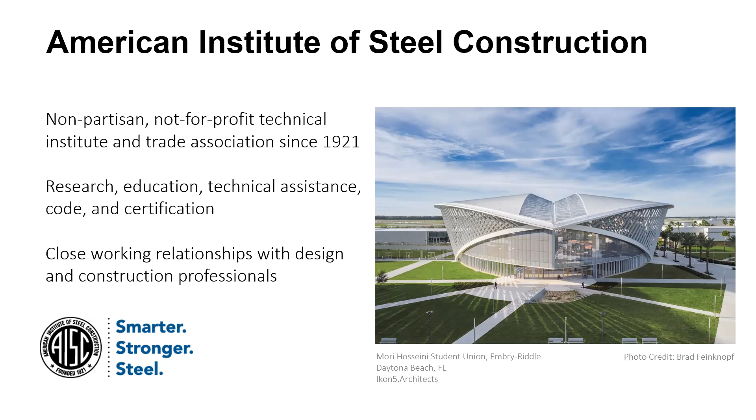I'll do a brief introduction of myself. I'm an architect and I taught architecture for over 22 years, 20 years of which were at Oklahoma State University, go Pokes. And I had to move home to Chicago, but I'm happy to still be interacting with students through AISC. And speaking of students, we do a lot with students.

You may be familiar with the ACSA Steel Design Student Competition that has been held since 2000, so a pretty long run. You're seeing some of the first place prizes from last year. On the left is category 1, the monument, and on the right is the open category, where you design anything as long as it's with steel.

This year, the program is a spiritual space on a campus of your choice. You can do this alone or as part of a studio, but you just need a faculty sponsor. So you can read through that program on the website, and we still have the open category just as we always have too.

We give lots of scholarships out. Last year, we had over $360,000 given away to juniors, seniors, and master's level students. We hope we have a good showing for these scholarships. One side tip is that we have a small essay, a short essay, and you need to focus on steel for that.

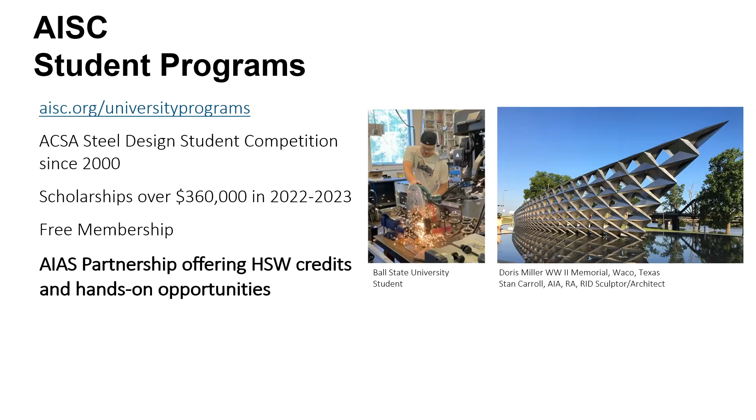We also facilitate a lot of hands-on opportunities, maybe in studio, but also at Grassroots next summer, we're holding a tour at the Ironworkers Training Facility just outside of DC, and you can weld, bolt, climb columns, a lot of different things there to get some hands-on experience. We encourage other kinds of steel activities like touring a fabrication shop or going on construction tours. If you can't do that physically, we have VR tours that you can walk through on our website.

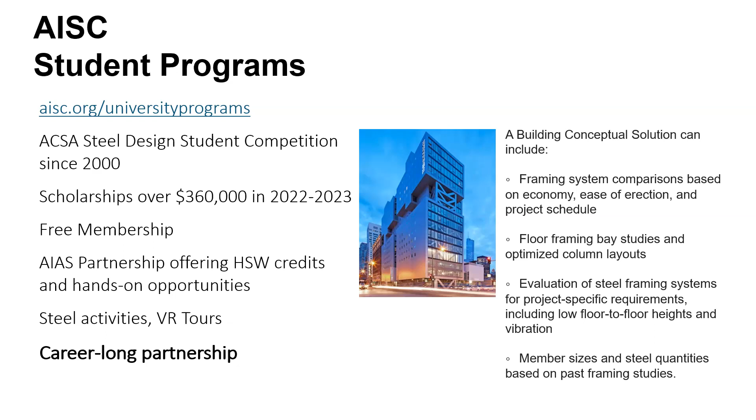And I mentioned emphasizing career-long partnerships. We have a Steel Solutions Center that architects and engineers can call into for anywhere from conceptual ideas and solutions to something more detailed. And you're going to hear more about this today, but if you're designing with sustainability in mind, structural steel is actually a really good choice.

U.S. domestic steel is truly cradle to cradle. That loop is closed, and every time it's recycled, it doesn't lose quality. So domestic steel is made up of 93 to 98% recycled steel. We take old cars, appliances, deconstructed bridges and buildings, and we keep those out of landfills, and that scrap is melted into new steel using electricity.

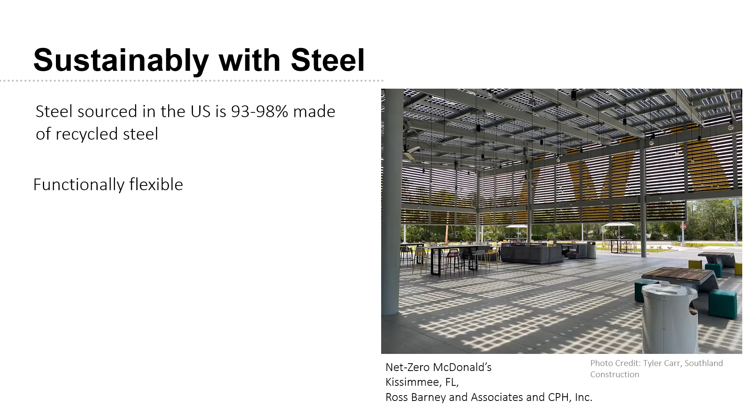But a steel frame building in the first place is less likely to be scrapped. Steel buildings over their life have lots of flexibility. If occupancy or loading changes, it can be more readily adjusted, and you can have longer spans so the interiors are much more flexible. We have lots of transparency in terms of reporting about embodied carbon of the life of steel material, so we have extensive environmental product declarations that anyone can view.

So in the US and Europe, electric arc furnaces are used, and they're a much cleaner technology than basic oxygen furnaces. So now the focus is shifting toward the electricity to power those, and a lot of mills and fabrication shops are moving toward renewable electricity. You'll hear more about that, but we mentioned you can get health, safety, and welfare credit.

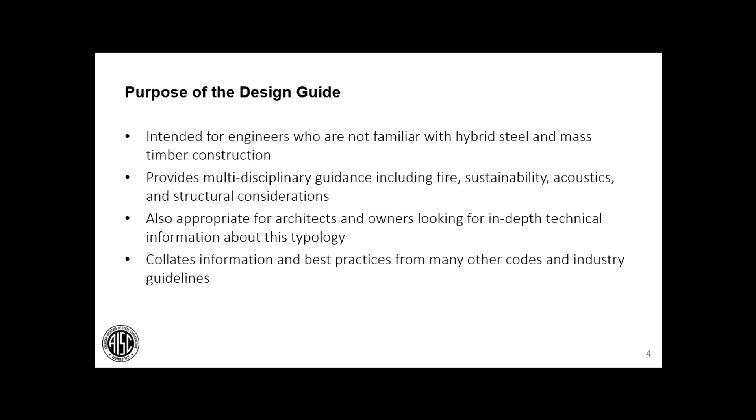So the main focus and audience was certainly some structural focus - there are sections geared towards structural engineers, but really we tried to be broader as we crafted this to talk about the typology of hybrid steel frames and wood structures that could be accessed both by architects as well as owners and developers who might want to know more about why you would entertain this system, what the benefits might be, and how it might be applicable to their project.

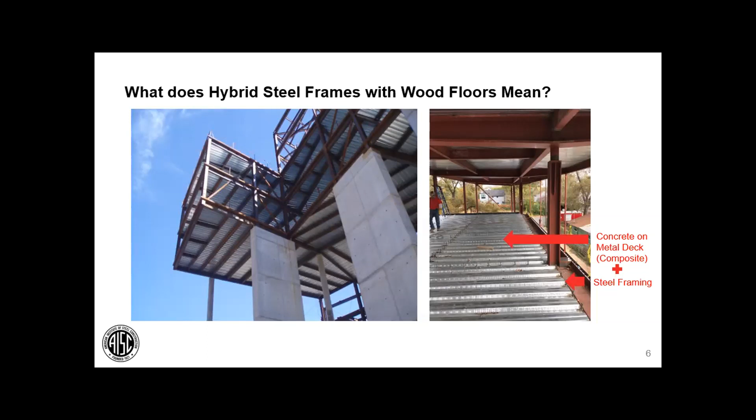And why is this different? Why did we write a whole design guide about this? Well, traditional construction with steel buildings, especially commercial projects, a lot of the times we've used concrete as that framing with metal deck, and it's a very effective system - the reason a lot of buildings use it is it's a good system to use. It has some benefits - essentially that metal deck that you see from the underside looks a lot similar to that previous image, and that metal deck has studs to connect the steel to the concrete. There's some reinforcement, and that steel deck acts as formwork from which to then pour the concrete on top. And the concrete actually works together with the steel to be a composite structure - that's what we call this type of system, a composite concrete steel on metal deck structure.

And this is looking at it from the top.

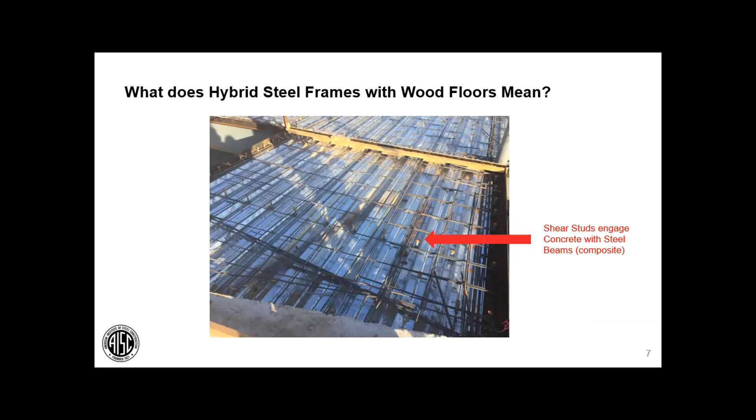Again, you can kind of see these are called studs. They look like little screws that are welded and connect the metal deck to the steel, and ultimately the concrete's cast over to have it act together.

We'll talk about why this is a little bit new and why we're seeing it more and more in the marketplace, and where owners, developers, and architects are asking for this.

The way we're going to chat through it is by going through the chapters. There are 7 chapters in total that we're going to walk through, and we'll go through the highlights on a lot of those. We're going to end with pictures, something you can see an actual building, how it's put together, to try to understand those components. That is going to be our case study with Houston Endowment at the very end.

So let's dive straight into chapter 1 and go into mass timber background information. First thing, what is mass timber? Well, we'll start with the opposite. What isn't mass timber? First off, it's not stick framing or balloon framing.

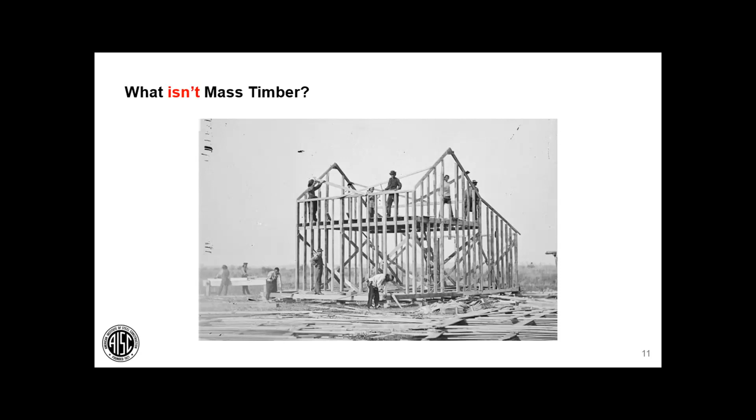You might see, especially in the suburbs, a lot of homes built like this out of really small 2x4 material or plywood. That is not mass timber. We usually refer to that as stick framing.

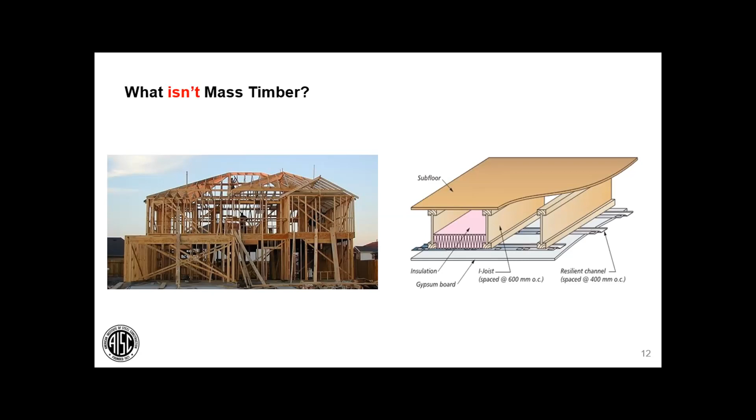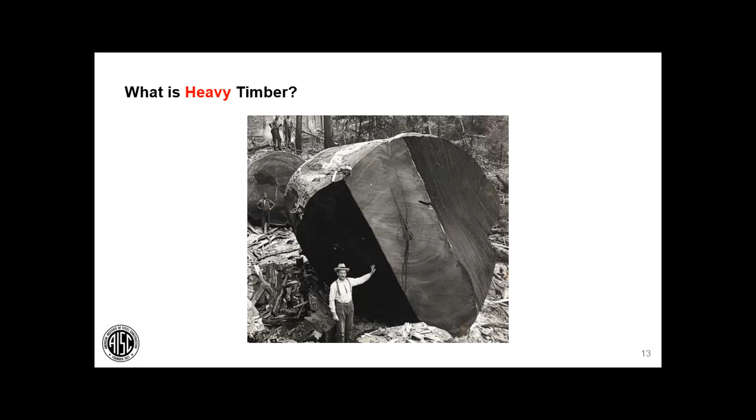Likewise, mass timber is not heavy timber. Heavy timber is sort of the opposite of the 2x4s. You actually get a tree and say, all right, let's go for a big piece of lumber—that's got to be mass, right? Well, no, that's heavy timber. That's where you have a larger piece of timber cut out of essentially a historic tree.

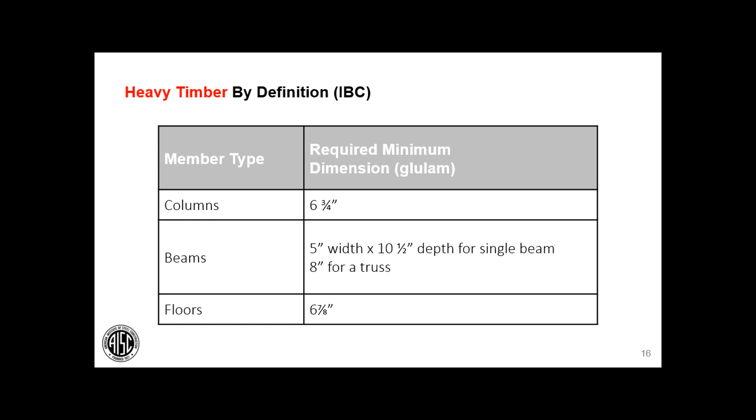If you go into the IBC, into the code, that's how heavy timber is defined—about its fire rating performance and having a big enough piece of wood to where under fire conditions it's essentially not going to collapse. So there actually is a definition for heavy timber, but really

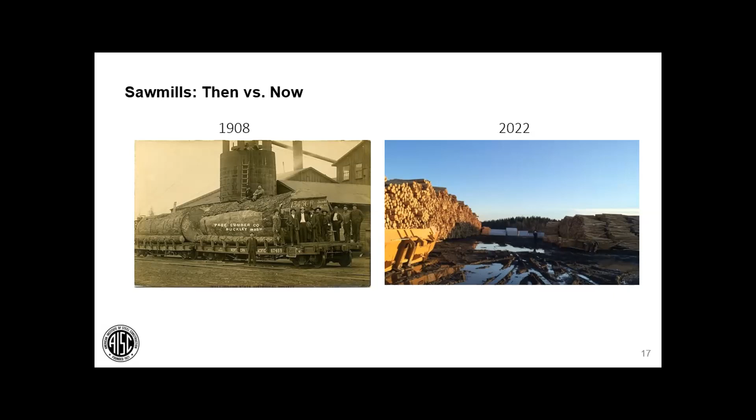when we say mass timber, it's kind of the next generation version of that. Heavy timber, on the left-hand side, comes from cutting down a really large historic tree. You can't really find those anymore if you want a very long span or a big element. So what we do is use more new growth trees and smaller members that we can then cut into components.

We can then actually look at the pieces of timber and rate them, seeing which ones are really good and high performing, and which ones are maybe not as good. We can optimize how we put those smaller pieces of timber together with some high performing glues, and then create large timber elements out of these smaller elements. That is fundamentally what mass timber is—you're creating an engineered product out of smaller pieces of timber to make a bigger element.

So pretty similar to heavy timber at the end, but how you build it and engineer it is much different. Some of the benefits are you can get a much more stable product because you can scan and look at each small piece of timber, rate it, and get some very high performance products. You can also get almost any size of element you want. Really what's changed in the last decade and plus is now you can get panelized mass timber products—not just glulam beams and columns, but actual plates and materials that can be used as pieces of floor plate.

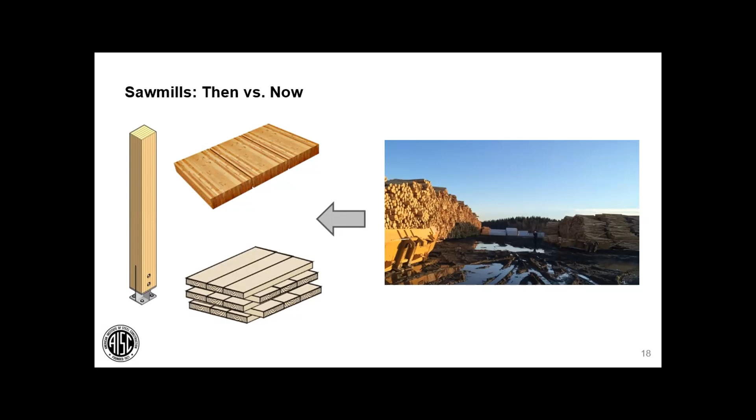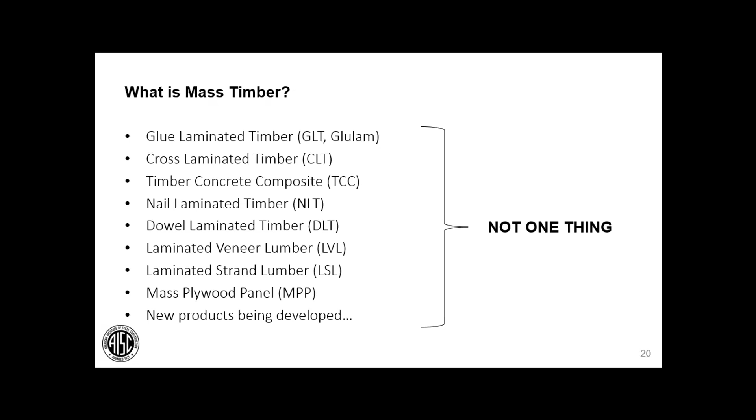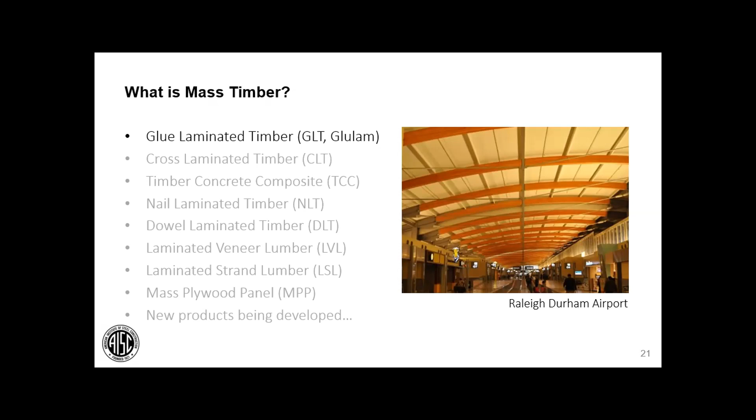So again, for a full mass timber building, a lot of times all the elements are created out of mass timber elements. That's not really our design, which is more of a hybrid, but really the mass timber floor could be any one of these elements. Mass timber is a big category capturing a lot of products. For example, glulam beams are linear elements, but you can actually turn them on their side as planks and use them as a floor plate in a steel frame structure as well.

But really what we're geared towards, and what this design guide is geared towards, is one of the more prevalent materials: cross-laminated timber, or CLT, as I'll refer to it for the rest of our talk. CLT is generally 8 to 12 feet wide panels, somewhere around 40 feet long, that can fit on a truck, and you can use them as floor plates or wall elements.

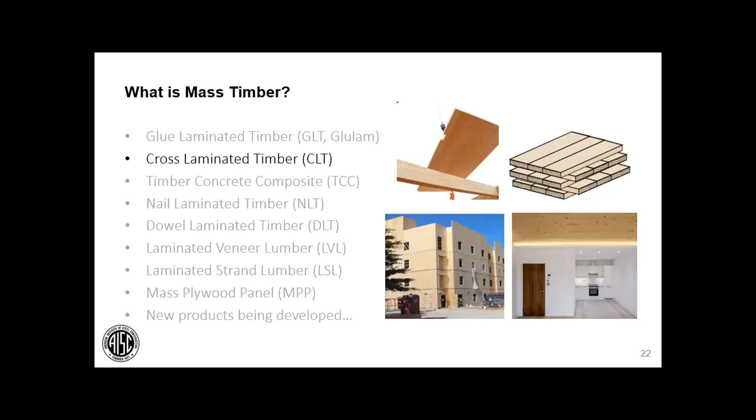You can make them almost as thick as you want, from 3 plies, or 3 levels of lamination, to 9 plies plus—you can get some very thick, large panels. And they're very high performing. They can have long spans, and it takes away the need to add metal deck and that manual labor aspect of welding, adding in rebar, and pouring concrete. You can now replace that with a more prefabricated element, similar to a hollow core plank, for those who have used or looked at precast panels. Sometimes that's used with steel framing as well, where they drop in precast panels. So it's a similar typology there.

We're just going to go through the others to show their names. There's timber concrete composite panels. There's nail laminated timber, where you nail 2x4s, 2x6s, 2x8s together to create a panel, and you can even do these on site. There's dowel laminated timber, a proprietary product similar to nail laminated timber, but you actually use dowels to connect it together, so there's no nails at all—it's a pure timber product.

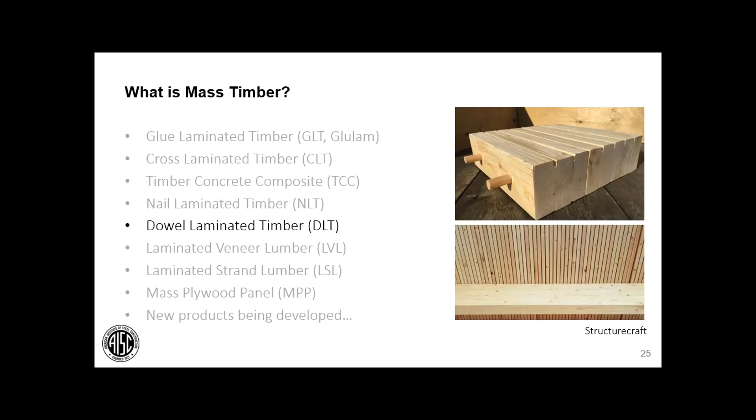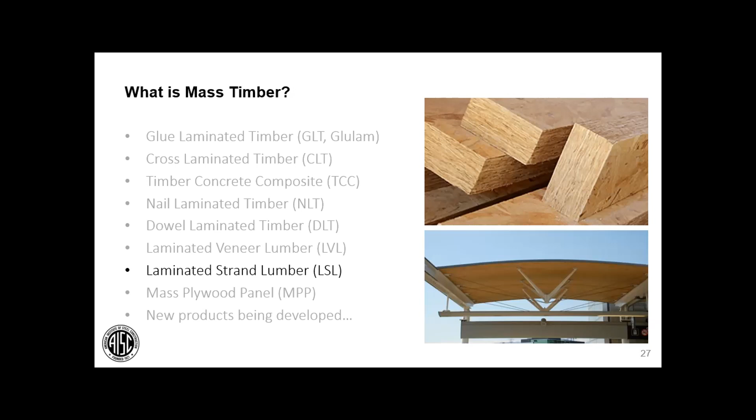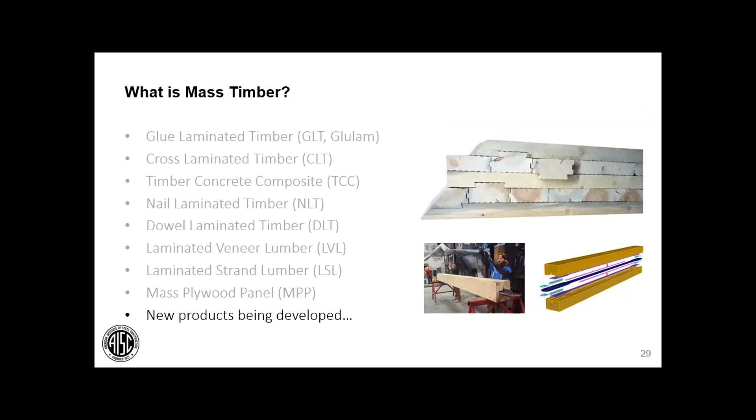There's laminated veneer lumber, then laminated strand lumber, made out of really small plies that you carve off the tree trunk. And there's even true mass plywood panels—literally really large pieces of plywood. New products are being developed all the time for different conditions, and all of these can be used with this design guide, but for our purposes we had to focus on something, and we're really focusing on CLT.

Just from a ply definition, what you're seeing here are 5 plies—you can count up each layer as a ply, and this is showing 5 of them. The typical plies you'd normally use would be 3 ply, somewhere around 4.5 inches thick, going about 10 feet generally for common loading in an office or residence. 5 ply is typically around 15 feet and closer to 6.5 inches. And sometimes for 7 ply, if you want to go 20 feet and have a much longer span, you're going thicker than that, adding 2 extra plies. So that's really what we mean by ply when we talk about it from here on out.

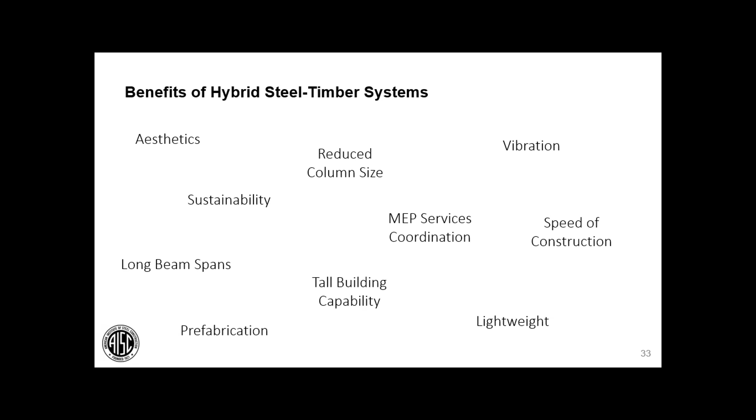Sustainability is another driver, as Gene mentioned—sustainability is a big driver for our structures, and structural engineers are being pushed, alongside architecture, to pull carbon out of our buildings as much as possible.

Some developments even require you to track and present carbon data. A big portion of the carbon in our buildings is in concrete. Going back to steel buildings with concrete, sometimes that's a good use, but if you're looking to take out carbon and can pull out that concrete, timber has a much smaller carbon footprint than concrete, and you get a lot of savings there. So that's a big driver too.

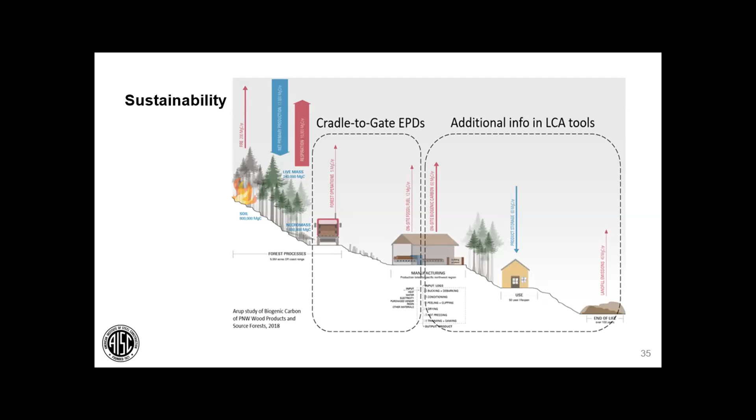Likewise, you can have longer spans with a mass timber floor building sometimes, just due to the fact that it's actually lighter than a concrete and composite metal deck. And compared to a full mass timber building, you can sometimes run into trouble for beam depths if you're trying to go a long span.

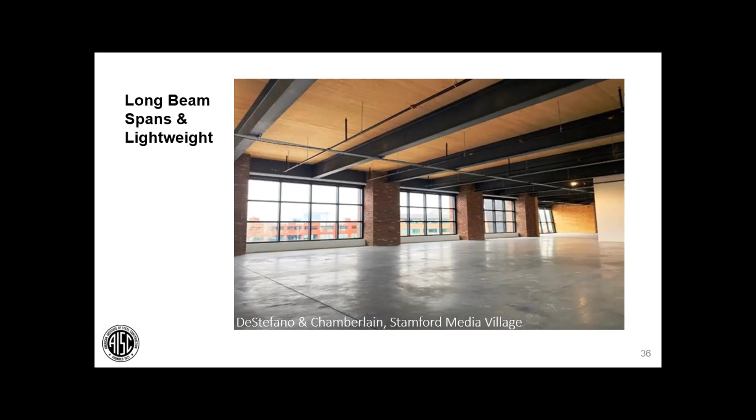For going something a little bit longer and wanting mass timber, steel offers a lot of flexibility and advantages for having a much smaller floor-to-floor height. Likewise, the columns in steel—it's a very high-performing material. We can get our columns a lot smaller than a mass timber building generally would have.

You also can have a lot of flexibility with how you attach to the facade. Steel does a really good job with shelf angles and all those attachments that you need with cladding, that other typologies would sometimes have difficulty with. Likewise, with steel, we can generally get penetrations and coordinate our MEP routing or MEP services, with a lot of flexibility in how we go through those spaces.

That's another reason where steel, having steel beams and steel framing as opposed to sometimes glulam beams, you can get a thinner profile overall. And a big one on the cost side—from a developer side and a contractor side—obviously schedule and cost is a big driver.

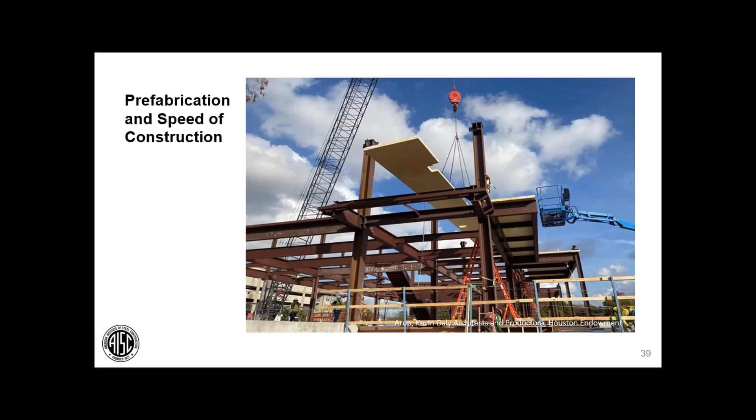There can be advantages there as well due to the fact that it's a prefabricated panel. As you can see here, those CLT panels are being brought to site off a truck and dropped straight in. They're lightweight, and because they're lightweight, you don't need as heavy equipment. So you can actually have a smaller site, a cleaner site, a smaller crew. It's safer with fewer people and lighter equipment, and the building can go up faster compared to other typologies laying on metal deck and concrete. That's a real big driver on the developer and contractor side.

And again, the site logistics, especially for urban sites or tight sites, because of that prefabrication, there's a similar advantage there.

So what does it look like practically if you were to draw this out, just to give you a sense of a framing plan? This is a floor plate for what might be a typical office building. You can see the columns are wide flanges—those are the I-beams you might call them. For an office building, it might be 30 feet wide in a bay by 40 or 45 feet. That's fairly common. This is showing 5-ply panels that are going left to right between the secondary beams.

You can see the secondary beams going kind of north-south on the page are around 27 inches. And then the girders going left to right that are picking up those beams and going to the columns are also at 27 inches. This is a fairly typical plan in an order-of-magnitude sense of how this is laid out.

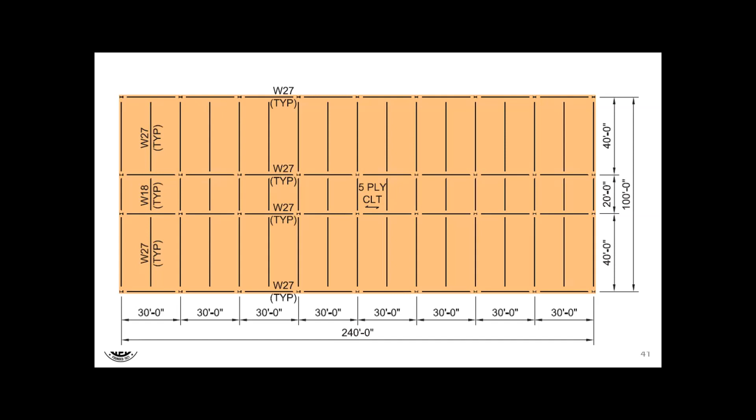We'll talk about it later on, but part of the optimization we look at in making it efficient is having a good grid size, a good bay spacing that helps limit waste in the panels so they can cut them and bring them to site. It's also efficient from a steelwork framing standpoint. But this is a fairly common commercial office bay that you might find.

Also, how you deal with the sandwich of the floor plate from an architectural standpoint is a real big deal. Really, a lot goes into that sandwich—it's not just a piece of timber doing a lot of things for you architecturally. It's your floor finish, it's also working for you acoustically, it's your ceiling. It does a lot of things, and how you consider your sandwich is something you really have to coordinate with all your consultants.

And it's something, as you're designing in your studios, you want to think about the acoustics, you want to think about the aesthetics, you want to think about how you're routing your mechanical systems. And really, there's kind of two main floor sandwiches that you end up with.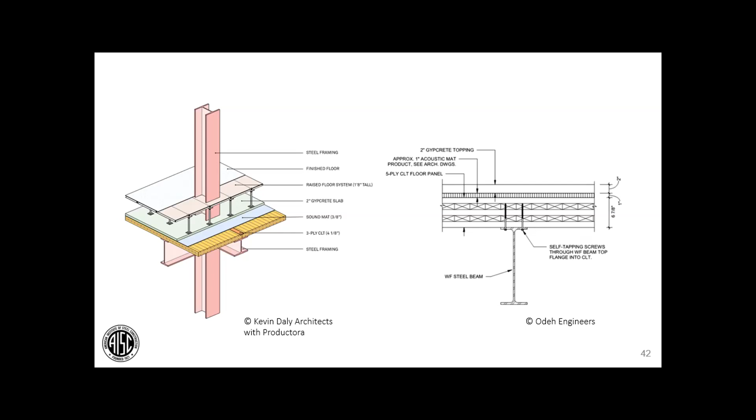The multidisciplinary aspect of this is really what makes it fun. It's relatively new, and it forces consultants and designers to talk and figure out these issues. As you try to tweak the acoustic issue and how you deal with acoustics, you might be adding more mass, which impacts your structure, and that structure might impact your sandwich, your overall height, and your facades - how it looks and feels aesthetically, and how the spaces feel. So you have to think through all these issues with this methodology, and there are more and more precedents and buildings coming out - it's really exciting to learn. So definitely a lot out there.

Let's step into a few of these issues. Fire design is a big one. As an architect, you will generally be responsible for the life safety of this building, saying whether it meets code from a life safety standpoint. Sometimes there's a separate consultant - life safety consultants - but a lot of times you'll be working with them, or have your own team asking, what type of building is this? What's the fire rating? Do I need sprinklers or not? All of that is part of that analysis. Structurally, for different size buildings, as you get bigger and bigger, there's a fire rating required on your structure.

Going back to it, there's a myth that if you have timber, it's just going to light on fire - it's a big fire risk, it can't stand up. That's not true. Timber, yes, it can ignite, it's combustible, but there's good testing and documentation for understanding that if it's thick enough, heavy enough, it can self-char and form char that provides resistance for 1 hour, 2 hour, 3 hours under a fire condition.

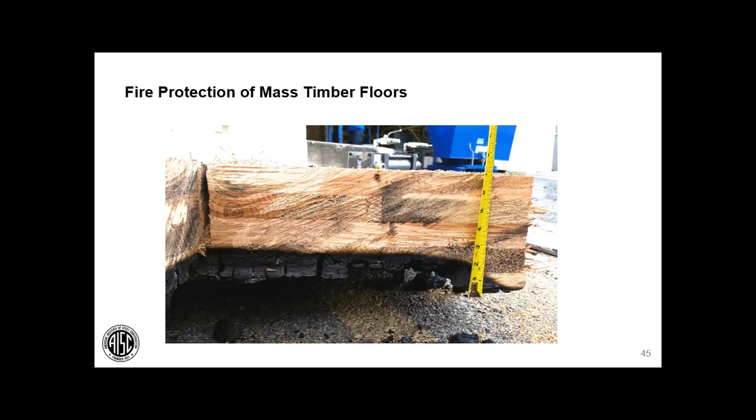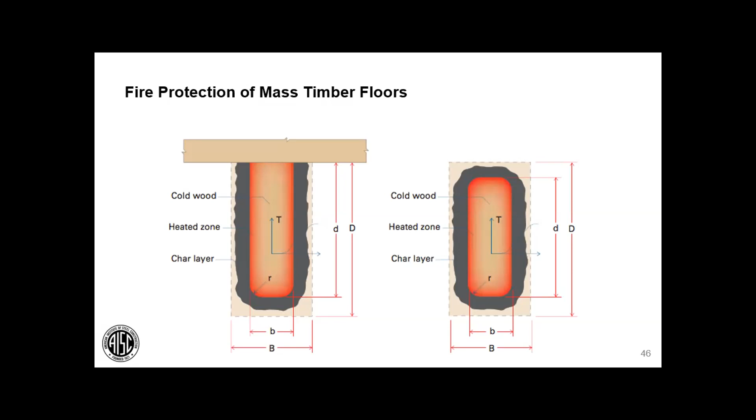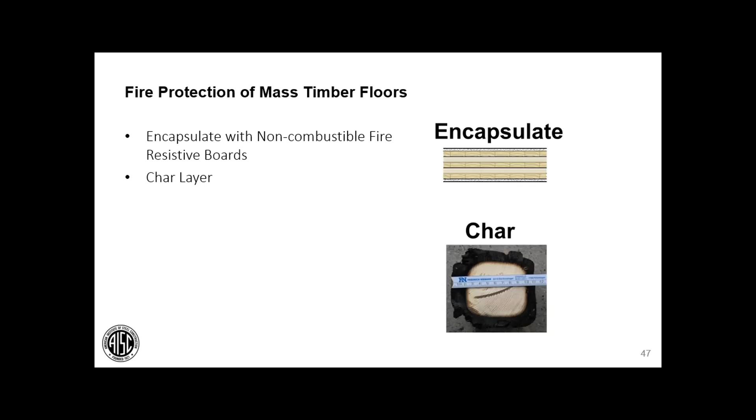That fire rating essentially means, if you have to rate your structure, you have to get a little more timber into your product in order to provide that charring. So you're basically buying sacrificial timber as your fireproofing strategy. Additionally, you could cover it - if you're required to fire rate it, you could put gyp board on it, for example, or other strategies to provide a barrier between the fire and the combustible material. Sometimes, as you'll see in the code, it does require you to encapsulate that timber.

On the steel side, you've probably seen fireproofing on steel where it's spray applied. For steel, generally you're still applying that, but if you're exposing the steel and don't want to see that cementitious or fiber fireproofing, you might paint it with what's called intumescent paint. Under fire conditions that paint expands and looks a lot like that char image - it forms a big insulating layer when heat hits it and actually protects that steel. So you would still use those if you have to fire rate your steel, and that wouldn't change.

As far as how tall can you build with steel and mass timber, well, the code actually in 2021, the International Building Code has provided some good clarification on having mass timber in buildings as part of your structure and how tall you can go.

As you can see on the right-hand side, there are now 3 types of building: type 4A, type 4B, type 4C. On a type 4C, you can go up to 85 feet effectively, 9 stories of office, and you can completely expose all of that CLT floor plate. That steel can be exposed as well, but it has to still be fireproof, and the CLT has to be rated for a fire condition, but everything can be exposed.

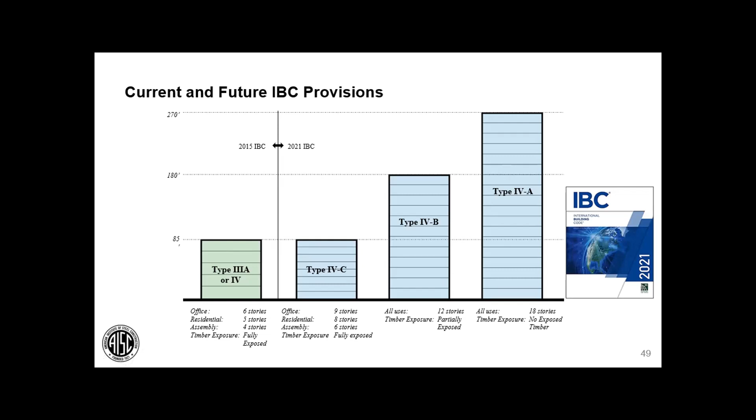The type 4B is basically an in-between, where a certain amount of the mass timber can be exposed, but not all. When we mean partially exposed, we mean something like this, where on the right-hand side above the kitchen, it's encapsulated with gyp, it's not exposed, but then over the living room or main spaces, you might expose that CLT in those spaces, in those structures.

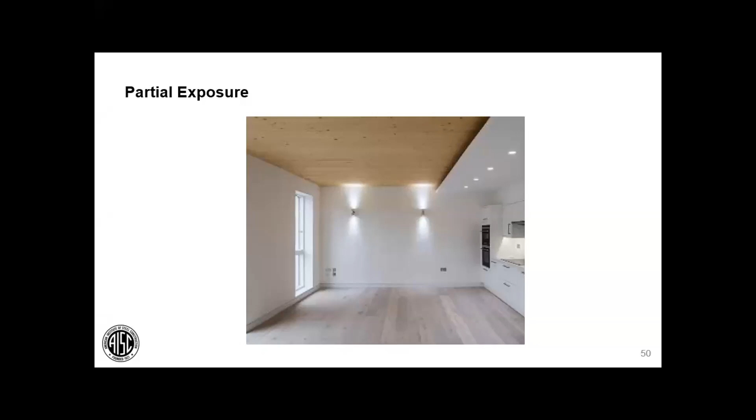So you can use mass timber, you can use it in the code. With your steel structures, there are limits to how you might have to encapsulate it, but hopefully that's a helpful guide for more info. There's lots and lots of info out there. We're just really touching it at a high level here.

Just a pointer on the intumescent paint: if you're detailing that for your review, you don't have to paint the top side. The mass timber on top of it will protect that steel and serve as that insulation on the top.

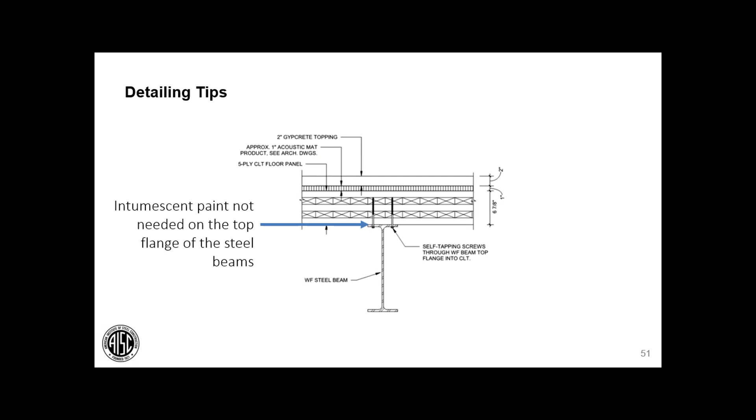So acoustics, at a high level, really what we're dealing with are 2 types of noise. The first one is sound transmission class, and that's how sound kind of transmits or blocks. Think of, I'm in a conference room right now, I could be right next to another conference room, and if someone has their speaker on, that speaker is going to transmit noise through the wall. How well it blocks is defined by that STC rating, the sound transmission class. The better it blocks, the higher the rating.

So that's sound transmission. But now, in the ceiling above me, I could have a really good sound transmission through the floor above me. But if someone walks around - I'm in Texas - if they come around with their boots and start walking on the floor and it's just a hard concrete surface, I'm going to hear that like a hammer, like someone's taking a hammer and impacting it. That impact is talking about the impact insulation class, the IIC. So that impact noise, it doesn't matter how good your sound transmission is, if someone comes with a hammer and starts banging on it, you're going to hear it.

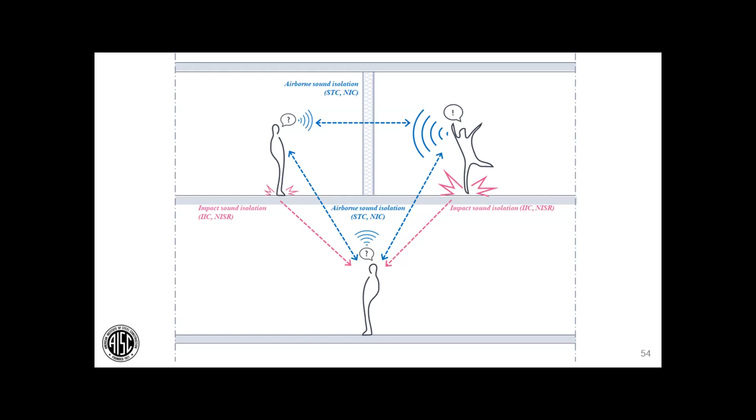Now, if you were to use CLT in your steel frame building on its own, generally bare CLT is not going to meet either a good sound transmission rating or an impact rating. And the reason it won't is one of the benefits - it's a lightweight material. That is a benefit, that is a great thing. It makes our steel structures lighter, we can span farther, we can take load off the foundation, easier to lift. All those things we talked about as pluses.

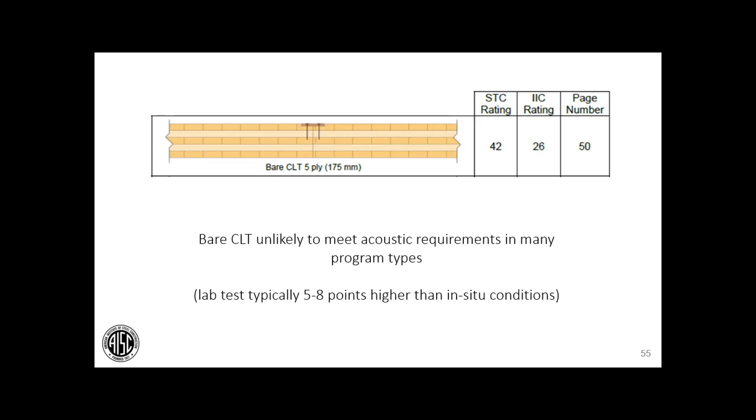Well, from an acoustic standpoint, and we'll talk about it with vibration, that can sometimes be an issue because in order to absorb energy - sound is an energy - in order to absorb that energy and stop it from transmitting, you need mass. And so that's one thing where the mass timber on its own doesn't have enough mass generally for these code ratings. And so there's really a couple things we have to do. We have to add mass in some way.

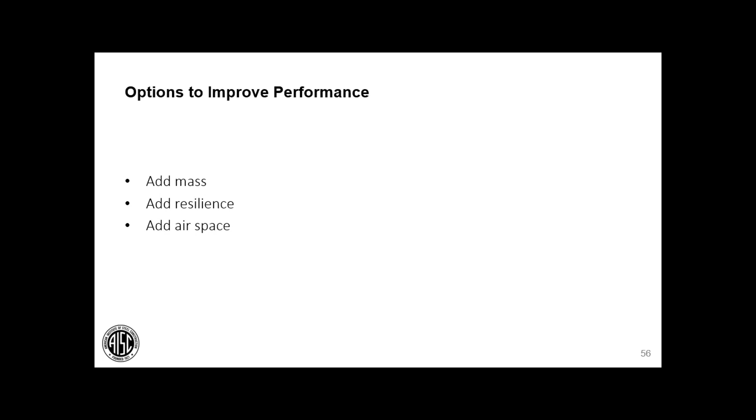A lot of times for impact noise, we need to add resilience, and sometimes you can even add an airspace. The way most CLT floors work, a general approach, is to have our timber structure, and then a resilient underlayment, somewhere around a quarter inch to a half inch, that they lay out on top. It's kind of like a squishy pad.

And then on top of that, they pour a mass layer, call it 2 inches of gypcrete, poured on top. What happens is that total sandwich of adding that mass together will solve the sound class rating, so sound doesn't transmit too much. But that resilient layer also forms a barrier for heel clicks. As people walk across, it goes through that gypcrete layer, but hits that resilient underlayment and can't transmit down. This really solves both of those in a lot of situations.

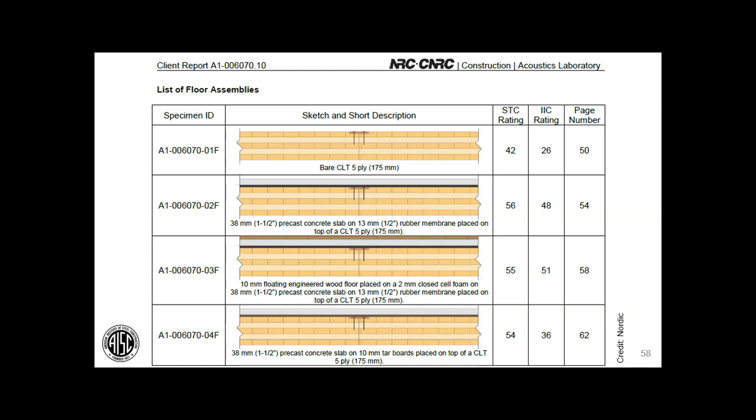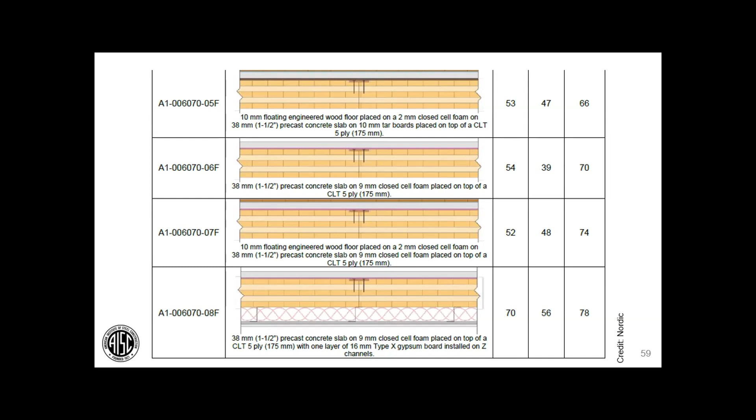There are a lot of guides out there, a lot of mass timber manufacturers who have sample buildups with different layers of the mass buildup and insulation. Sometimes they even count on having a ceiling below with airspace, and you can get lots of different ratings. You can nerd out on this stuff, go crazy, but we're not going to cover it in this presentation. Hopefully that's a good intro to give you a sense of why we have those extra layers on top of the CLT and what they're functioning from an acoustic standpoint.

Going back into the sustainability side of things, which Gene introduced very well, there's a couple of terms we want to talk about. Gene mentioned the bottom one, the environmental product declaration. That's really saying, essentially from a life cycle standpoint, how much carbon is there, what's the environmental impact, and having that measured in a scientific and third-party verified way, so you can compare products side by side for how they're performing.

The two other things we're going to talk about are operational carbon versus embodied carbon. When we say carbon, sometimes people mean one, or the other, or both. For our standpoint, we're really talking about embodied carbon as part of our presentation. Embodied carbon has to do with structures and materials you bring to your building — how much energy, how much carbon was put into growing them, cutting them down, manufacturing them, and bringing them to your site.

The operational carbon is the day-to-day continued energy and carbon that your building uses to run, things like your lights, your HVAC system. All that has to do with the operation of the building, and that's continual. So that's not what we're talking about here.

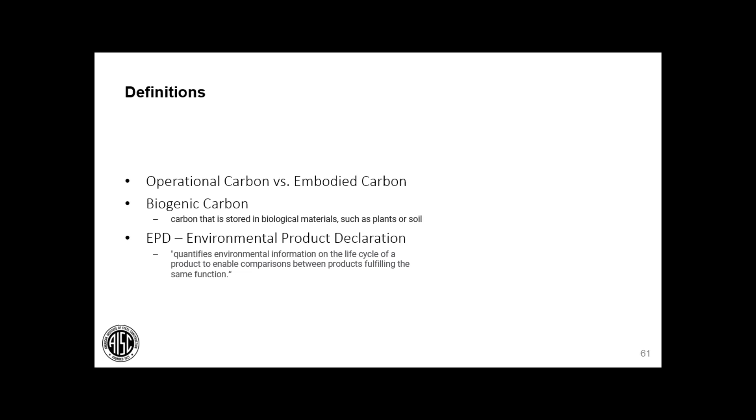Only if you put it in an oven, or in your barbecue pit or grill and light it on fire, you're then going to release all that carbon back into the atmosphere and environment. But unless you light it on fire, generally for the life of our buildings, it's still going to be carbon negative measured across that time period.

So as part of this study, to show the relative benefits of what a mass timber and steel frame building would do, there's a study of three typical floor plates for an office or residential building: a 30-foot by 30-foot normal weight concrete post-tension slab, a fairly typical typology for a lot of those buildings. On the steel side, you might have the same bay with steel framing and lightweight concrete on top of the metal deck to form it. And on the right-hand side, you see steel framing with mass timber, still with a concrete topping, but thinner for the acoustics.

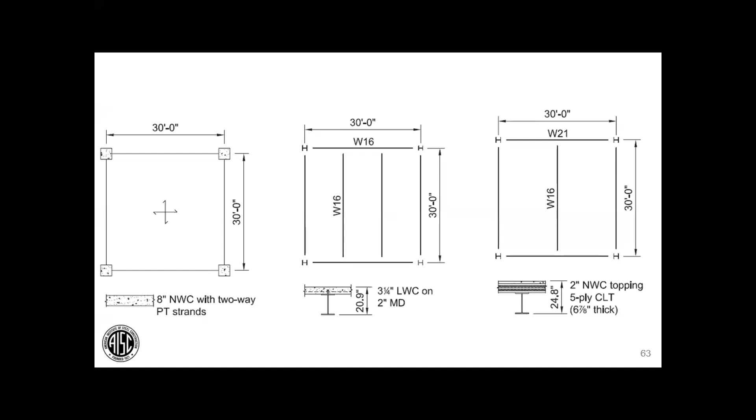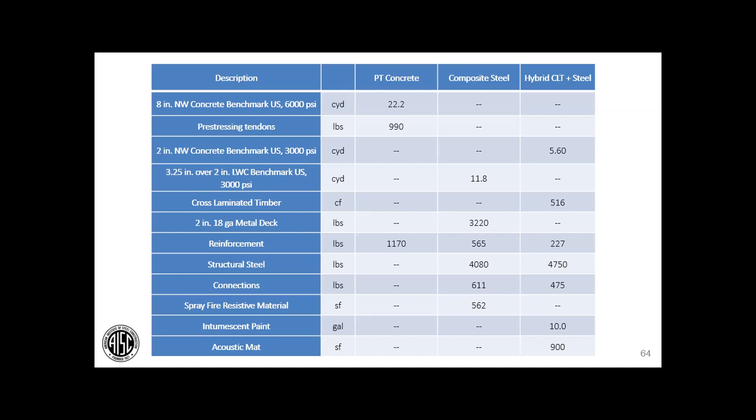This report, if you want more details, it's all in the design guide, does a sample calculation trying to compare and study them. As you're looking towards schemes, you can do something similar as you evaluate options and schemes in your designs, with a similar process to what we're showing here.

There are some really nice programs out there, lots of different ones. We're not endorsing any one of them. We've just shown two to show that there are differences in how you evaluate it and things like biogenic carbon and how you approach it. There's a whole methodology and discussion you could have on this, and we're just presenting two paths to show some examples: one is Athena and one is Tally.

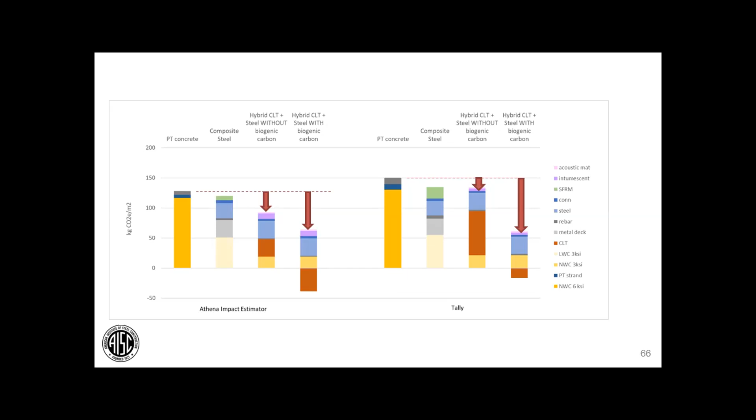But you can see here, as you go further, you've got the steel framed building with CLT floors, including biogenic carbon and not. The main takeaway is that whether you count the biogenic carbon or not will change your equation. But in general, you're getting a reduction, especially compared to the concrete side. So there really are a lot of benefits on that carbon side. Again, if you can take any carbon out of that concrete and switch it with timber, generally there's a benefit there on a carbon footprint standpoint.

Now, another guide you might use, a freebie tool I wanted to share with you, is called ECOM, Embodied Carbon Order of Magnitude Estimator. SE2050, the Structural Engineering Institute, has set a goal for structural engineering firms to sign on to try to be net carbon zero by 2050. As part of that, they provided this calculator where you can put in some estimates for any type of building, and it will give you an order of magnitude estimate of what the carbon intensity might be from a generic standpoint. It's a good way to test different schemes and options and see a rough order of magnitude of the carbon between them.

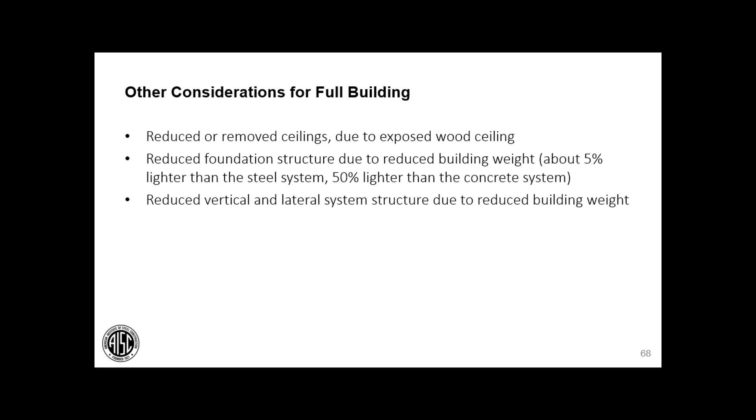The other benefit, not really captured in that study, is the knock-on effect of having exposed CLT as your structure. From an embodied carbon standpoint, if you can get rid of your ceiling, that's additional carbon savings in embodied carbon. Likewise, if you're a lighter building, especially compared to a full concrete structure, if you can get a lighter building, you're pulling out concrete from your foundations, and there are further benefits and reduced embodied carbon you might find there as well. Those are the other knock-on effects of being a lighter structure that you might capture from a carbon footprint standpoint.

So the next section is about the structural design, and this was really geared towards structural engineers. For the structural engineers listening on the call, there are other presentations that go into more depth, with full calculations, lateral torsional buckling equations. We're not talking about that here.

I'm going to walk through just a few of these items and what they look like, to help give you a sense from an architectural student perspective of how things are put together, to help inform how you might draw a building section or what type of systems you might need to think about laterally as you're thinking through from a scheme standpoint.

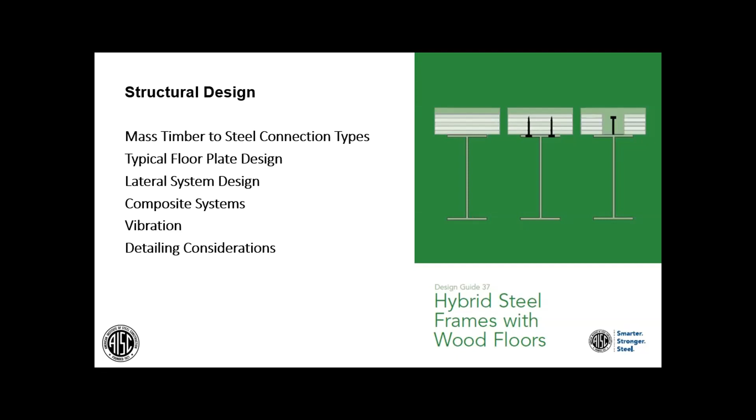So the first thing is really about how does it connect together? What does that detail look like? Well, it's pretty straightforward. You have a steel beam, and as you can see on the right-hand side, you pre-drill holes on the upper portion of your flange, and as they drop in the CLT, you use specialized self-tapping screws, like nominal drills you'd buy at a box retail store, and screw them in from the other side very quickly.

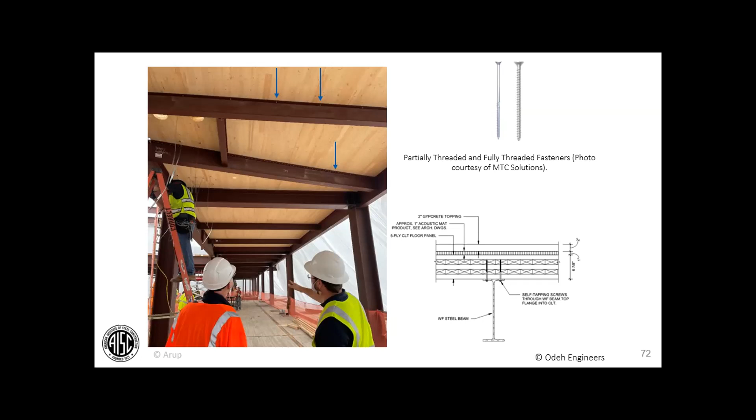Typical spacing is somewhere around 18 inches on center, 12 to 18 inches on center, usually switching sides. That's the top picture where you can see that spacing pattern - there's another screw on the other side you can't see. Sometimes structurally we have larger loads in the floor plate that we have to transmit back into the structure, and we may have to decrease the spacing for that. So that's showing you the different spacing you might see.

As far as sizing the steel members for your structural classes, the steel stays the same as probably any type of structural system you've been looking at, and that's what makes it really nice - that's one of the advantages of this system. The steel framing, by and large, how you approach it is the same as you would with a steel frame building with metal deck and concrete. So you're not unlearning any of that.

The only big difference is that generally we're not pre-cambering our beams. Pre-cambering means you bend your beams in construction so it settles and deals with some of the deflection as you pour on that concrete - generally we don't do that. And likewise, if you heard that term composite, where you have shear studs that make the steel and concrete act together, generally we don't do that either with these floor plates. These steel beams are non-composite.

So they are generally designed to be structurally independent of that timber, and you'll generally be a little bit deeper than if you were a composite system, because you no longer are relying on the benefit of that concrete.

There's also a full calculation for how to size your timber panel per the National Design Specification - that's the code. NDS is the term for the timber structural code to size your CLT panels. There's a full calculation for sizing a 3-ply, 5-ply, 7-ply, how you might approach it. We're not going to go through it here other than to let you know there's a full calc if you needed to see it in that design guide.

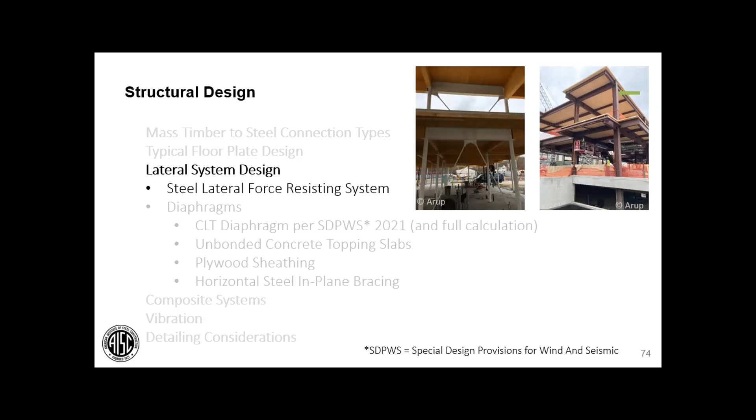There's also talk about a diaphragm. That really just means the forces inside of that tabletop. The horizontal portion of your table is actually keeping the legs together. That's a diaphragm, a way to think about it from a very high level. There's lots of discussion there, and structurally it's a big deal to us, but from an architectural standpoint, generally not something you need to know about in great detail.

But looking at the diaphragm, it's really talking about how you connect these panels together so they act as a unit. Generally the panels have a little piece of plywood, the light colored material. They're called spline elements that bridge over the two panels and screw them together. Likewise, we sometimes have metal strapping, sometimes light gauge, another element that also transmits forces and ties everything together. That's all part of the diaphragm system you might see if you went out to site.

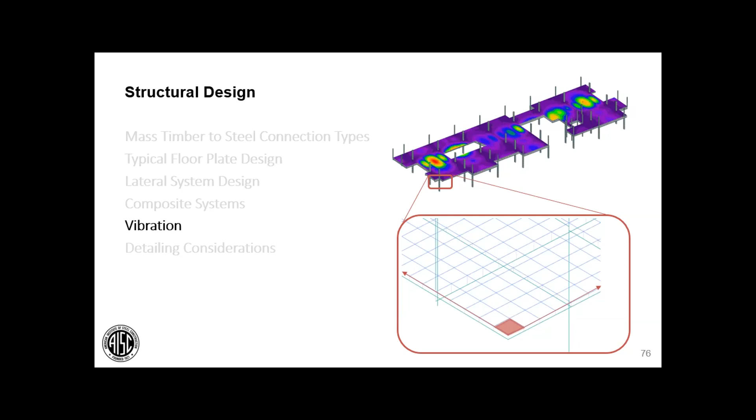Another consideration you need to be careful of, again from the acoustic conversation, is vibration, especially if you're in a space like a medical building with sensitive equipment, or a long span next to offices where people want stillness and might be sensitive to feeling vibration while concentrating. Those are things you need to be careful about with these structures. We won't go into detail other than that there are tools and ways to investigate and actually measure the anticipated vibration you might get from footfall, for example. It's a term we use for people walking, their footsteps at different speeds, whether running or going slowly, and seeing how it impacts the structure.

And finally, there's a section that really talks about details. If you're interested in details about openings or moment connections and considerations, this would be a good section to go to. The three things here that are probably most relevant: camber, we generally don't camber our beams, you can have fit-up issues with these rigid panels, but it's really the penetrations and facade supports.

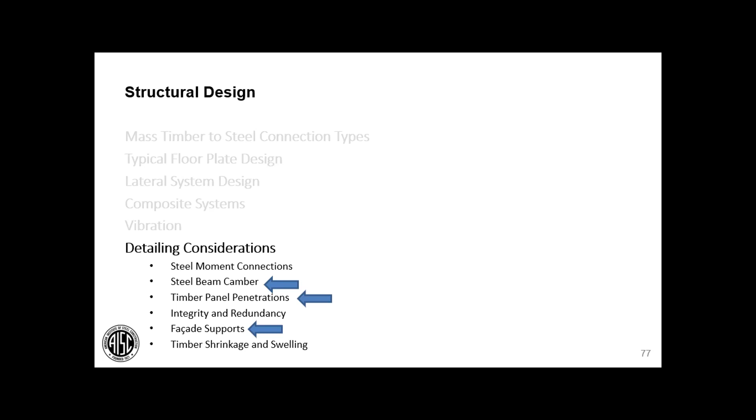What we mean by that is the penetrations are the openings in your floor plate through those CLT panels. You need to be careful with those for your mechanical systems and think about them. You may have to frame around them.

3-ply mass timber panels tend to have less strength redistributing load compared to thicker plies. So when we evaluate the plies, 3-ply is typically around 10 feet, 5-ply around 15 feet, 7-ply around 20 feet. That's about true, but also for openings and how you have to reinforce them, the size of openings you can get in a 3-ply is much smaller before you have to add reinforcing compared to a 5-ply or 7-ply. So if you have a lot of penetrations or want flexibility, sometimes you'll choose a larger ply, both for longer spans and a more open span between your beams. You may also want that for flexibility with your penetrations and openings. That's a consideration you look at holistically together a lot of times.

And again, from a facade standpoint, you need to be careful with your facades. A lot of times mass timber panels can't really take a large concentrated load on their weak axis, especially for something like CMU or masonry. If you're going to have brick on your facade, generally you're going to need another structural steel member or other way of reinforcing that panel to pick up those loads.

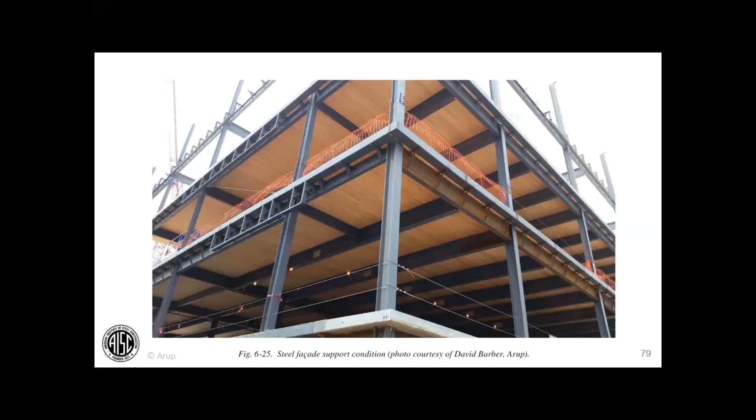And the same shelf angle details you might have looked at or thought about for supporting your facade with a steel building will still apply here.

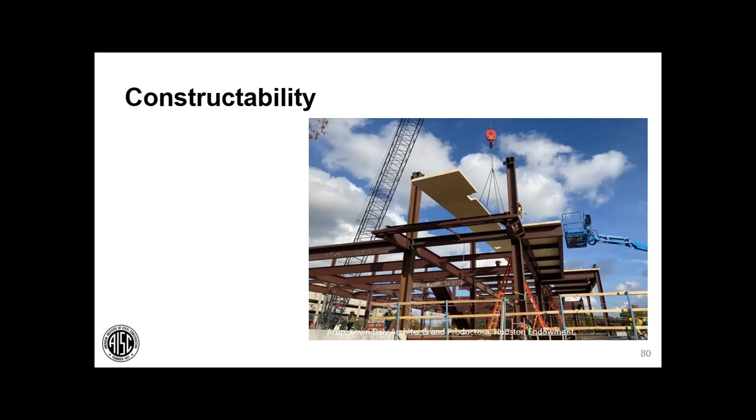On the constructability side, this was really geared towards a high-level chapter for contractors. The main things we talk about are procurement, thinking about the erection process, tolerances between different materials—especially concrete and CLT, where you can have issues with fit up and tolerances—and how to think about those, as well as how to protect the timber during construction if there's a fire risk.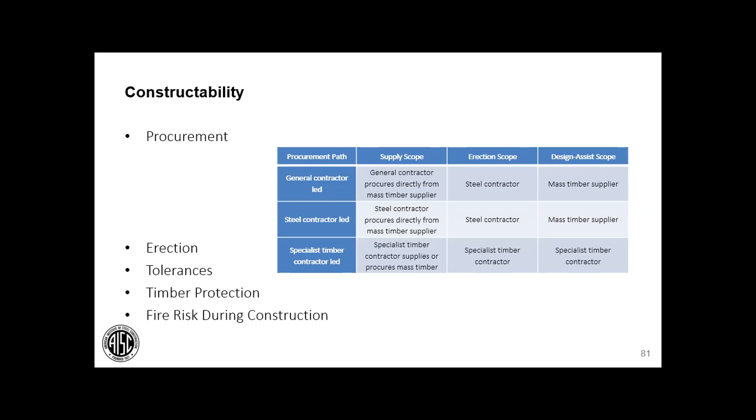So believe it or not, we've come to the end of those sections, and that was a lot of information. I think this next section is to take a breath now and say, okay, that was a lot—help me put that back together. What does that look like in an actual building and a case study?

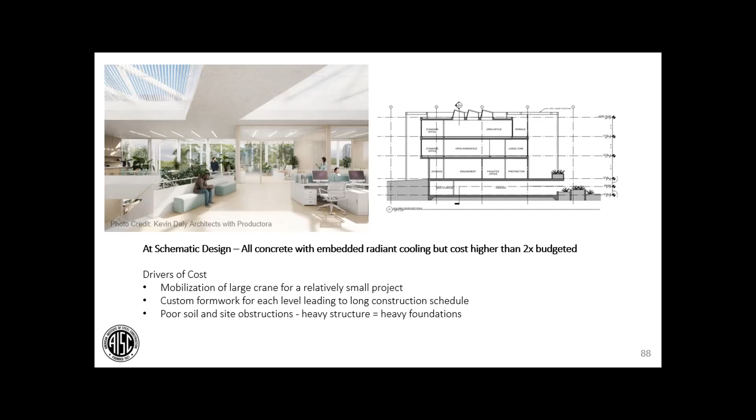It required a pretty heavy crane and a very long construction schedule to shore everything and form it up. All of that led to the structure being out of budget by about a factor of 2 at the end of schematic design. We had essentially a crisis at that point. This is an amazing project, how do we rescue it? What can we do? What are the options out there?

We really had a narrative as a team of looking at the sustainability, taking that from an operational standpoint and thinking about it to solve this problem. Steel framing and hybrid really was a natural solution, it came up very quickly, and we schemed it up really in like 3 days and presented it.

It was driven by the aesthetics. It was still really beautiful, it has a similar sort of exposed structure. It also was much quicker to erect. It's all steel framing, everything. The steel is effectively prefabricated in shop, brought up and bolted, and then the panels are brought in. So it's much faster. Likewise, it's lighter, significantly lighter than that concrete structure.

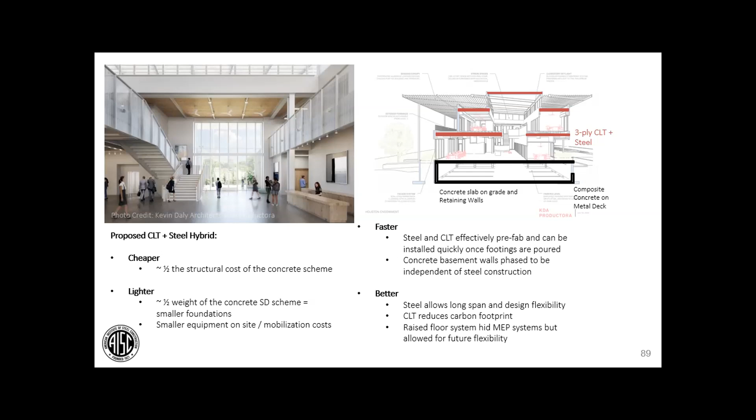So we pulled out a lot of the costs and a lot of the issues in the foundation. We ended up with a structure at the end of the day that was lighter by about half. We pulled out about half of that carbon. Also, all of that concrete was heavily carbon intensive, so we were able to pull all that carbon out. Likewise, it was faster to install and better from those other aspects aesthetically. So it was a great solution - everyone was brought on board, it brought the project back in budget, and we kept moving forward.

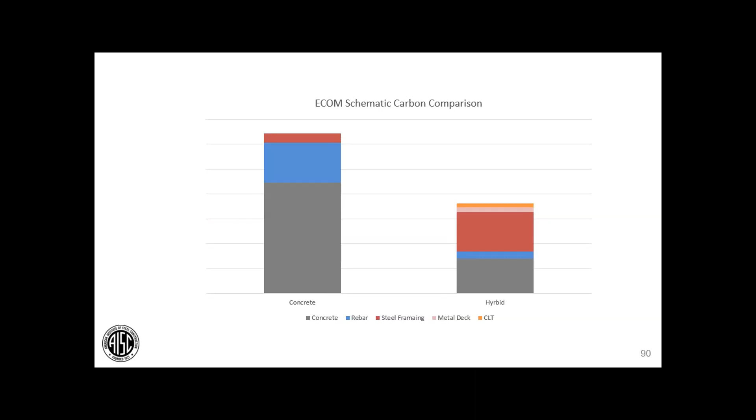As part of that, just to use that ECOM tool, we actually did a quick study at the time to see it and help inform it. These were just based off of scheme numbers at the time, but you can kind of see the reduction of carbon by about half.

The floor plate and how it's built up on that second level is using a raised access floor. That was selected for a number of reasons - a big part of it was flexibility from an MEP standpoint. They could put in the MEP and hide it, so you're not seeing it, but also for adaptability in the future, you can lift up those floor tiles and access it. If you were to change an office or change a space or change the routing, there's a lot of flexibility to do that at that level. It also kind of hid the acoustic sandwich and everything else that was below that.

Structurally, we have moment frames. If you remember on the structural side, what lateral system should you use? Well, in this one, we use moment frames where we have rigid beams and columns acting together that are spread across the building. We did that to distribute the load because we needed to spread out our forces due to our foundation. We wanted to make our loads as uniform as possible, including our lateral loads. We see hurricanes down here in Houston.

So there's a lot of load, especially with that canopy blowing into this building that we had to deal with. Also, it allowed flexibility - braces are great, they're very efficient, they're cost effective, a lot of times from a steel standpoint, but you can't walk through them. This was a very flexible space, I wanted it to be an open space, and this allowed us to get rid of braces within these office spaces.

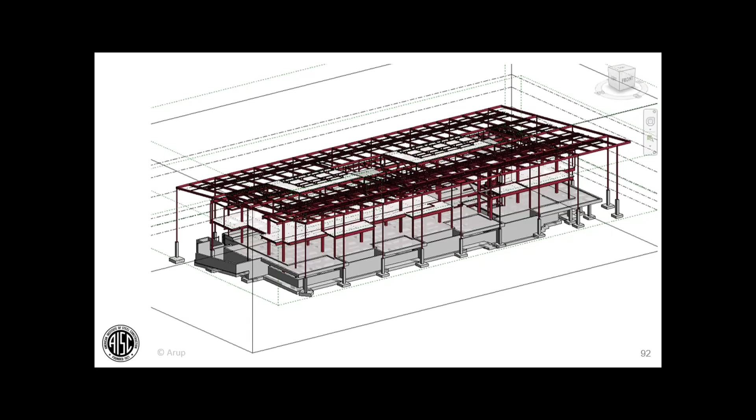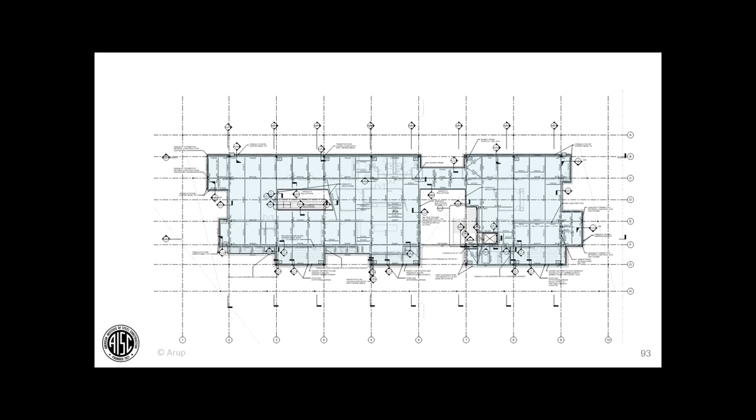A couple things to draw your attention to from a detail standpoint to help you visualize it. On the left-hand side, what you're seeing is a big cantilever. This is one of the advantages of steel compared to, for example, a full mass timber building. You can certainly use glulam beams and have cantilevers, but they tend to be deeper and can sometimes be more expensive.

Steel deals with cantilevers - it's a very high performance material. You can weld double cantilevers together. It's a good material to deal with these type of conditions. We utilized this on this building to have some cantilevers for key conference rooms and meetings on the outside faces.

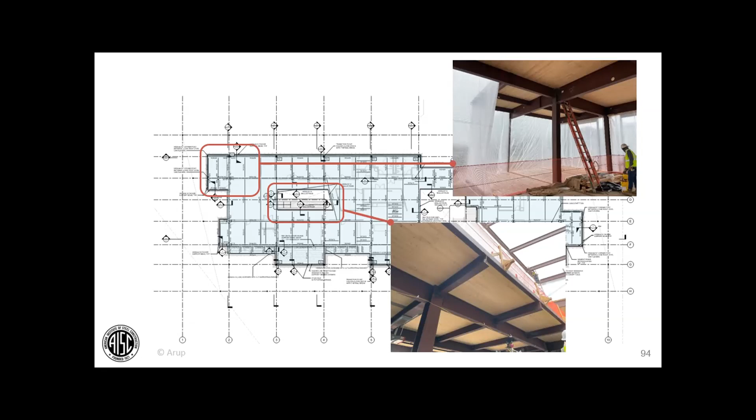Likewise, for the opening of the atriums, we're able to have simple steel to go around to connect to, then clip on all the handrails and other architectural components.

Vibration was a big issue. Where we had our columns and the offices, we had our main walkways, and so people walking across, it's kind of like a diving board as people would go across those main corridors, with people behind them working away at a desk. We did have to consider how that vibration would behave, and upsize some beams in order to deal with that.

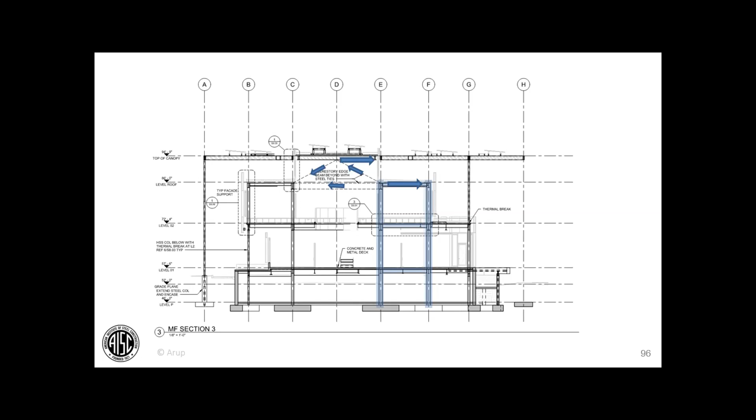Structurally, the steel provided a really clean way to integrate a steel canopy that was always going to be steel back with the structure. We have really large loads in that canopy, all those louvers act like a little sail and pick up a huge amount of load that has to go back into the building, and the steel provided a clean way to deal with those forces. Steel connections can deal with high levels of forces in a very elegant and clean way compared to other materials, and we took advantage of that in this project too.

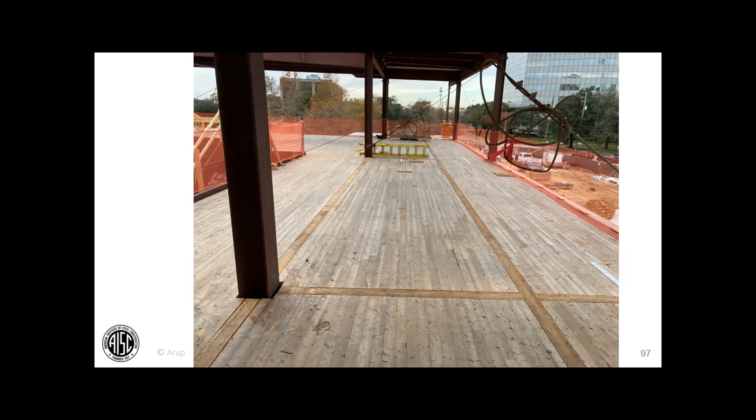Again, what does it look like from the top side? You can see those splines we talked about, those pieces of plywood connecting the individual panels together that are then nailed or screwed on both sides. You can also see the metal strapping serving as part of the lateral system, to have the whole tabletop here of the CLT act as a cohesive unit.

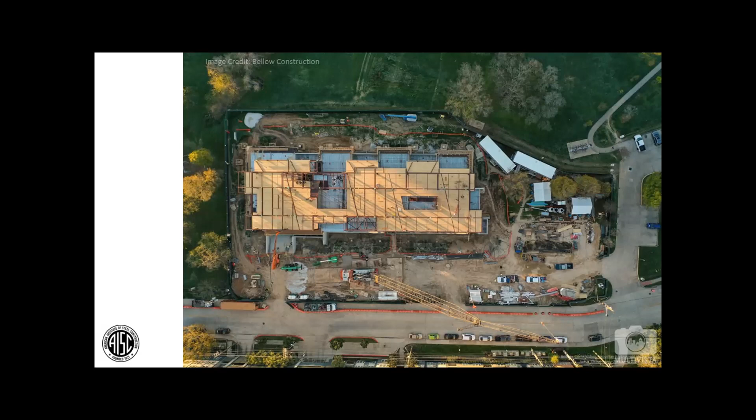Finally, it was a very tight site - this was it, the whole building. The crane here was the only crane on site, and the CLT panels would essentially be backed up into the truck, dropped, and installed over the course of a day for an entire level. So it was a great way to deal with this very constrained site. There was an apartment complex just across the street that they didn't want to disturb and had to deal with, so that was another advantage of the system.

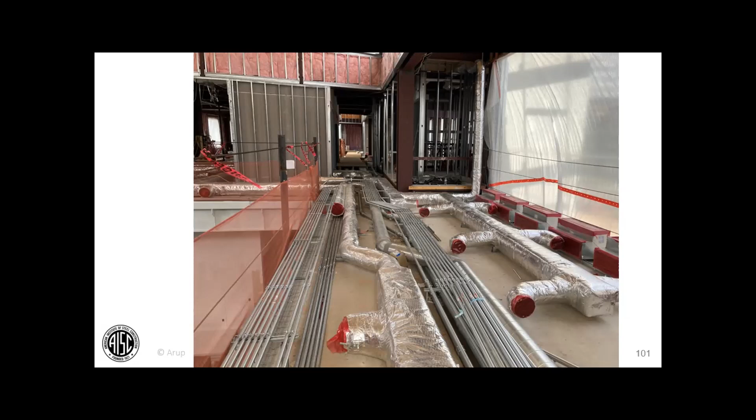Just looking before they put in the raised access floor - so why would you consider a raised access floor? Well, here's a great image of all these utilities and MEP. You can absolutely route and coordinate them, but if you don't have them here, they've got to be in your ceiling, and that's covering your steel and your CLT potentially. So that's one of the drivers or benefits. There's certainly a cost you have to weigh, but that's one of the advantages of that raised access floor.

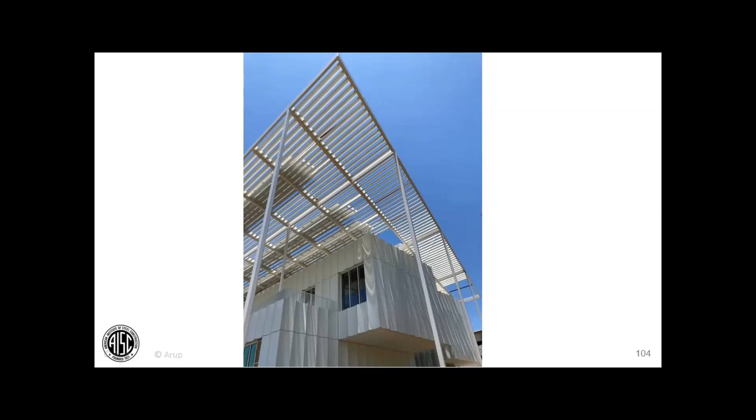This was opened just recently, and you can actually go visit it and walk around the site with the canopy. It's a beautiful building, very successful, and it was a great experience. Hopefully it was helpful to show how steel framing in a mass timber building was applied in a real project - how all those considerations on acoustics, fire, and everything came together, and to see the advantages I was able to utilize to get the project back on schedule.

And with that, that's really my last slide. Thank you for going through this guide with me. I hope it was useful to you, and it's really been my pleasure to present this.